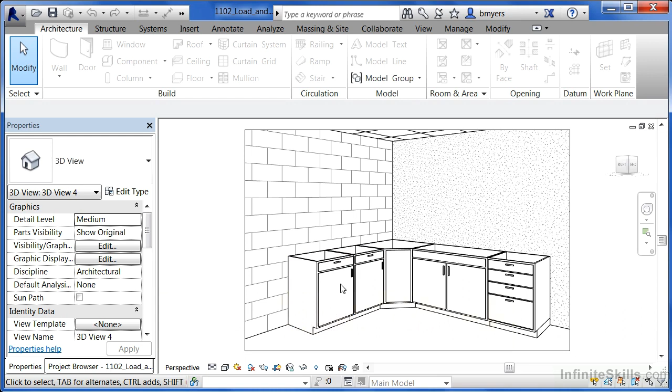We currently have casework wrapping around the corner between these two walls. The only thing is, it doesn't have a countertop sitting on top. So let's go through the process of loading in a countertop and placing it here in our view.

Our best bet will be to begin by going into our first floor plan, because placing a countertop is a lot easier if you're looking straight down at it. Move up to the Architecture tab and select Component.

Move your mouse over and select Load Family. The kind of family we want is a countertop family, and it doesn't show up here on the list, but it's located underneath Casework. Double click on Casework, and here we'll see a Countertops folder.

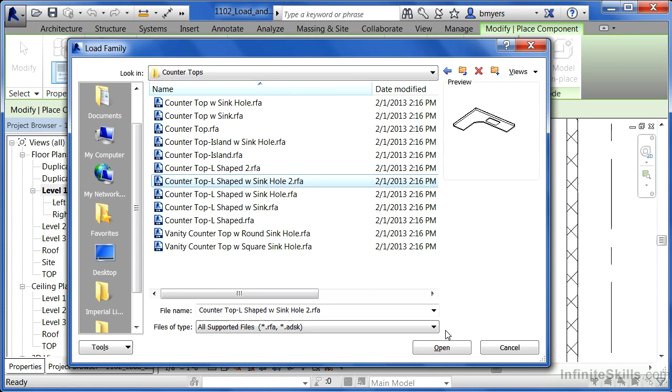Double click there, and we want to load in the Counter Top-L Shaped w Sink Hole 2. Select that, we'll see an L-shaped countertop, and that's exactly the shape we need to place in our project. Click Open, and you'll see it following your cursor around.

Now what you'll need to do is hit the space bar in order to rotate this around until it's the shape you want it to be, or in other words, going in the same direction as the casework underneath.

Zoom into the corner, and then click to place it when you see those two blue lines there. If for some reason all you're seeing is dark, thick lines, and you're not seeing the two blue lines like we just had...

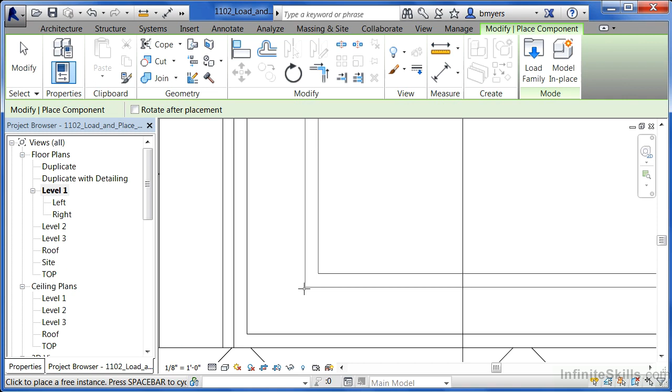What you can do is come up to the View tab and click on the button that says Thin Lines. So if you have dark lines like that and want to see those individual thin lines, go to View and Thin Lines to see that level of detail.

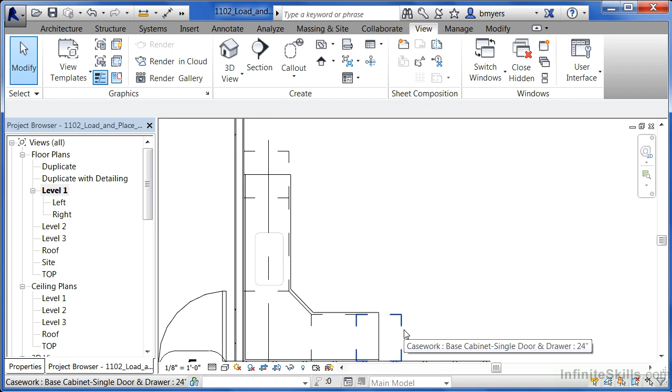Now if we zoom back out again, unfortunately, because of the dimensions of our casework down below, the countertop currently isn't covering the entire thing.

To adjust this, select on the countertop. You'll notice this option right here. Click on the arrows, hold down, and drag it out, letting go when you get to the end. Do the same thing up here at the top. When you've done that, it should now cover this pretty well.

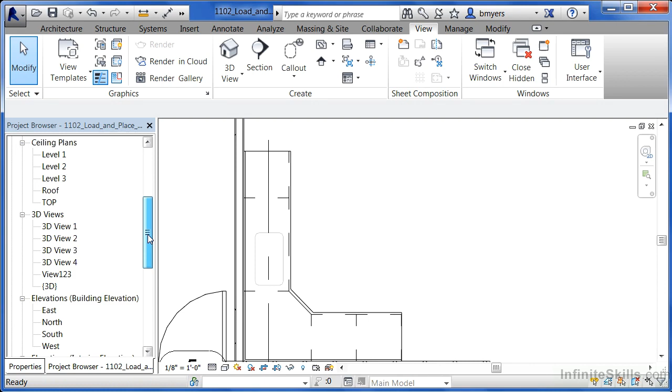The next thing we'll want to do is take a look at this from a camera view to make sure it's at the right elevation. To do that, we come down here on our list and double click on 3D View 4, our camera view for this room. Here we can see we have the countertop with the sinkhole in there, going around the corner.

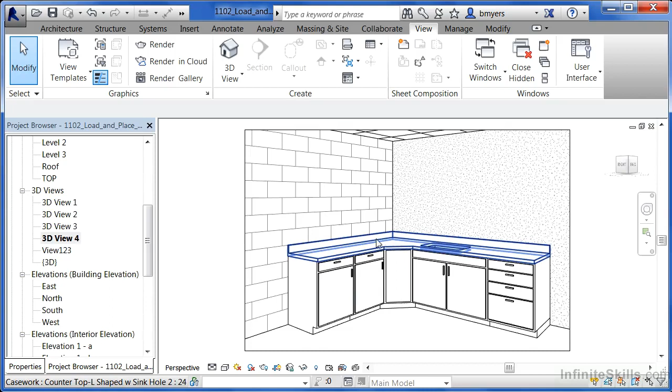So to place countertop, the first thing you may need to do is just load it into your project. After that, go into a plan view, click at the intersection of wherever you'd like it to begin, and then adjust it as needed. At that point it's a matter of selecting the counter, and in plan view you can drag the ends until they're in the right locations.